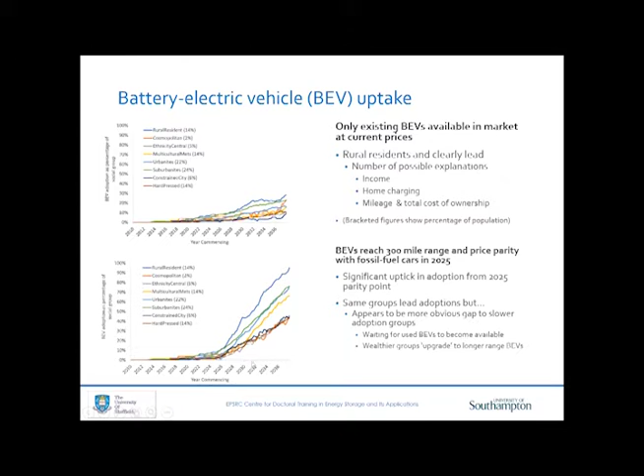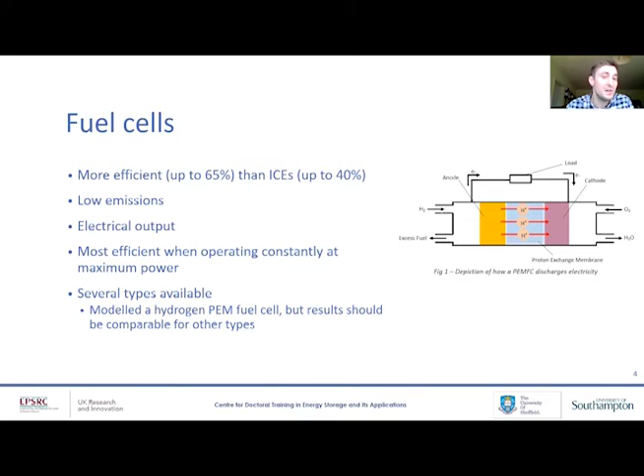There are several possible candidates for types of fuel cells we could use in ships. For this particular project, I've modeled a hydrogen proton exchange membrane fuel cell, but I do believe the results from this study are comparable to other fuel cell types.

Auxiliary services, auxiliary demand, hotel load—these are all terms for the energy demand on board a ship that doesn't go directly to propulsion. For example, major loads include compressors, pumps, heating and cooling. The main thing about these is that they do tend to have an electrical demand. Therefore, this is why we're interested in them in the context of fuel cells.

So the main idea behind this piece of work was to analyze whether we could retrofit hydrogen fuel cells onto existing operating large-scale ships in order to decarbonize some of the energy demand of the auxiliary services. To do that, I've used some data provided from Shell, from a large vessel, to analyze its historical auxiliary demand, then try to size and figure out what kind of scale fuel cell and hydrogen we might need on board.

Then I've simulated what the output of these different setups might be on a voyage by voyage basis, and also tried to outline some key opportunities and technical challenges.

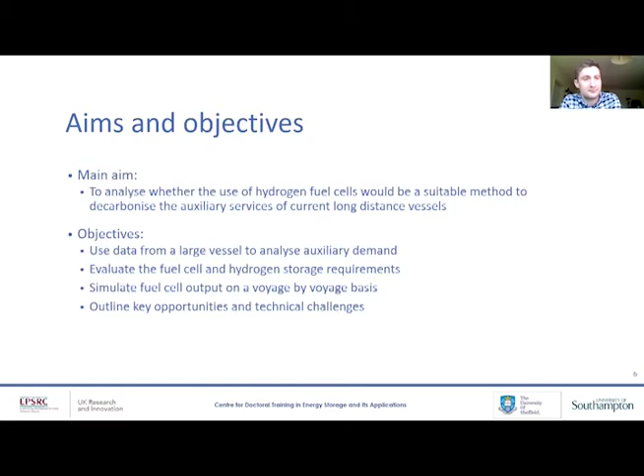So as I said, the ship itself happened to be an LNG tanker, which is a relatively large ship, and we've considered the ship to have typical operating patterns of a large ship. So the results from this study should be not only comparable to other tankers, but also other large vessels such as container ships.

It's possible by looking at the data to break down the usage of this ship into 33 different voyages over a 12-month period. In other words, this was 33 separate opportunities to refuel. For the purpose of this case study, I've assumed that hydrogen refueling would be available in every single one of those ports. Obviously, that wouldn't be the case in the short term and might take a while to develop.

So it's important that any concept we put forward should be capable of operating without access to hydrogen for a long period of time. But for the purpose of this exercise, I've assumed that supply would be there. This fleet in particular actually currently runs off 3 separate fuels: liquefied natural gas, heavy fuel oil, and marine diesel oil. And the simulations that I wrote were in Python.

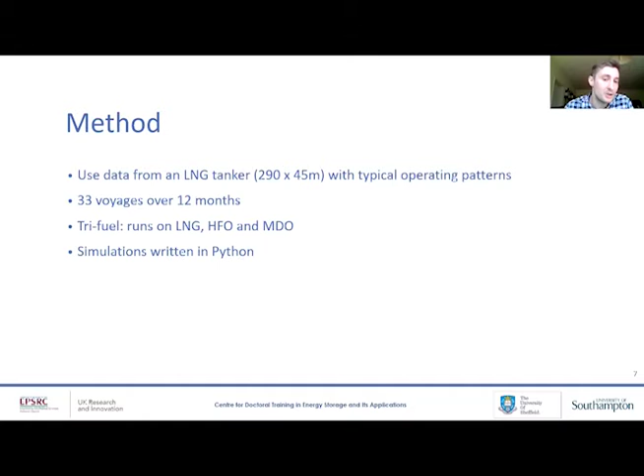For this particular investigation, we've decided to focus on looking at the auxiliary demand of the ship whilst it's in transit, i.e. when it's not in port. There's a couple of reasons for that. First, when it's in port, that's when we're going to want to refuel the hydrogen, so we might not necessarily have access to it at that time. And there may be better options for meeting the auxiliary load when in port, such as cold ironing, which is where you basically plug the ship into the local national grid.

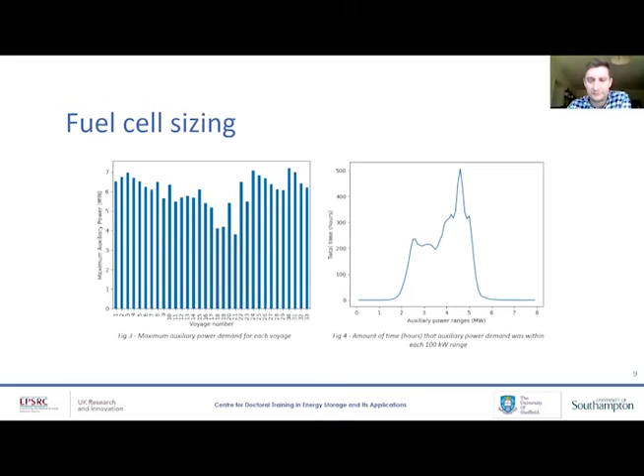5 minutes left, Charlie. Sorry? 5 minutes left. Okay, I'll try and hurry up.

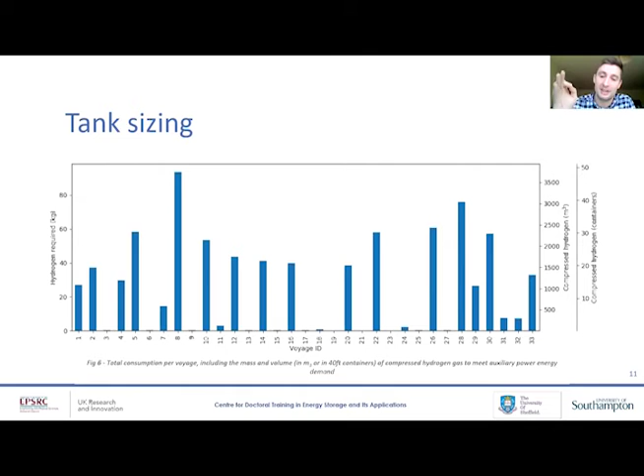So the far right axis, I've tried to show exactly how much this equivalent would be in terms of 40-foot containers of hydrogen, to put it into a shipping context. And for this particular case study, we decided to pick 10 containers worth of compressed hydrogen as quite a modest starting point to see how far that would go.

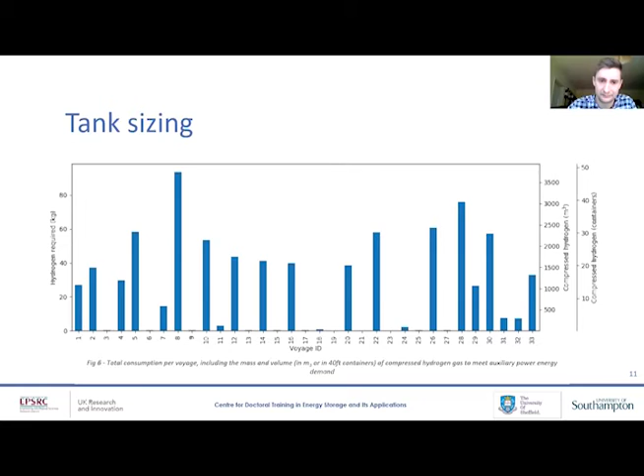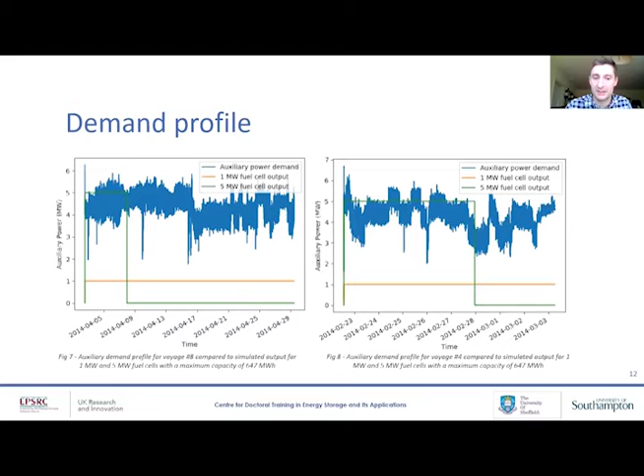So we conclude from this that if you're doing lots of long voyages, then a smaller fuel cell would be better. And if you're doing lots of short voyages, then a larger fuel cell would be better. Obviously if you're using a smaller fuel cell, it's going to cost less and take up less room. So we could judge that for a given period of time, there probably would have been an ideal optimal fuel cell size for a given hydrogen capacity.

So I wrote a simulation to look at these different fuel cell sizes, how much the fuel cell would have outputted, how much excess energy would have been lost, and therefore the total fossil fuel reduction. I'll try to go through this quickly, but for this given case, we can see the 3 megawatt fuel cell would have actually been optimum.

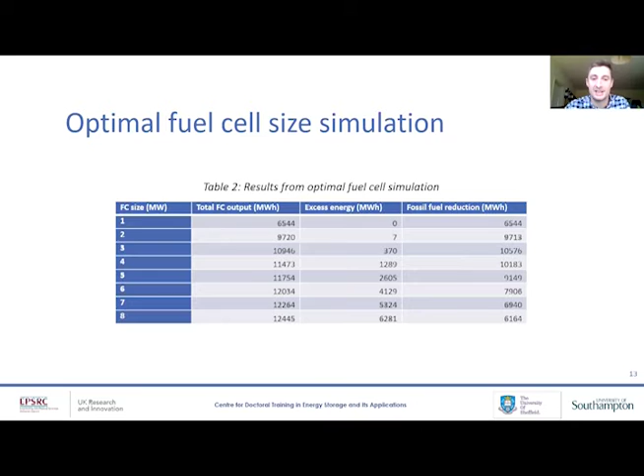To put some numbers behind that, for this case study of a 3 megawatt fuel cell and 10 containers worth of compressed hydrogen, which is quite a modest introduction, this would have outputted 10.6 gigawatt hours of the 24.4 gigawatt hours I pointed out in an earlier slide. Based on historical fuel usage, we could compare this to the actual to show the amount of fuel saved, which would account to 2,343 tons of CO2 emission savings per year, which is quite significant.

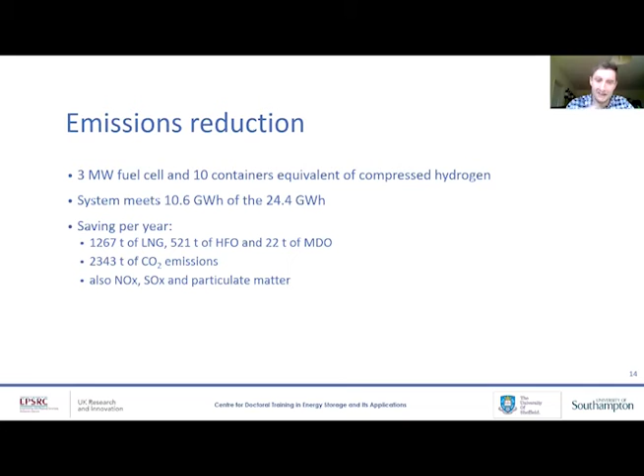As well as other emission savings such as nitrogen oxide, sulfur oxides, and particulate matter. So to summarize, from quite modest additions in this case study I've simulated, we've made quite big emission savings. We've also found that if you're doing lots of long voyages, a smaller fuel cell is preferable, and for lots of shorter voyages, a larger fuel cell is preferable for the same hydrogen capacity.

Obviously there's quite a few technical challenges with this. The hydrogen supply might not necessarily be available to begin with in the short term. Hydrogen is always tricky to store, so that's a consideration, and there would be a capital cost with this concept. But I think this would be a really good learning opportunity if this is the way the industry is going to go, and we're going to be using fuel cells on ships in the future anyway. Having experience of handling hydrogen and seeing how fuel cells work for these large vessels would be invaluable at this stage, so I think there's some merit behind it.

Okay, thank you for listening, and I'd like to hear your questions.

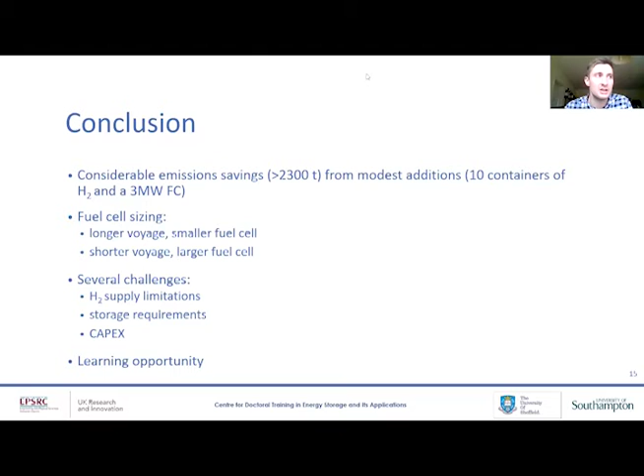So in terms of what's out there at the minute, there's very little examples of fuel cells being used on ships. These tend to be for short distance ferries or very small scale ships such as the Energy Observer. There's not really any demonstrations of fuel cells being used on large scale ships, which is why we feel like this particular concept could be a kind of gateway into trying to demonstrate that.

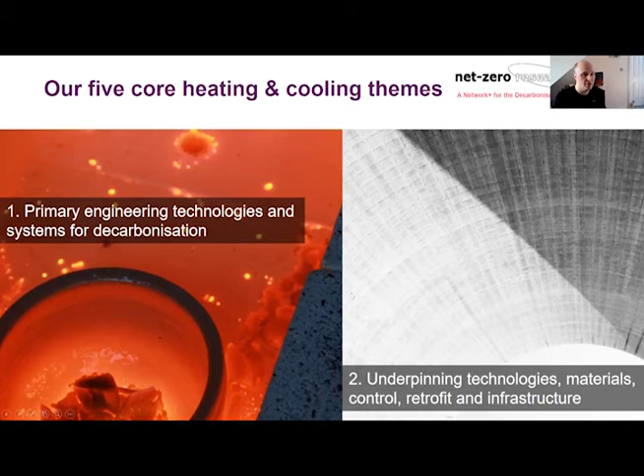The question on a holistic level is what does our future energy system look like, and how will that support heating and cooling, and how do we afford that, and how are the economics working alongside that? Then there's the less scientific domains, but really key and important - understanding how users and social impact of changing our heating and cooling systems will affect them, and how can they feed that information back to the engineers. Then we've got the policy side, where we're coming to terms with the idea that heat will be more expensive in the future. How do we set in place the right kind of policy to support and help roll out and manage people's expectations of that, as well as developing the leadership to help us do the transition to net zero.

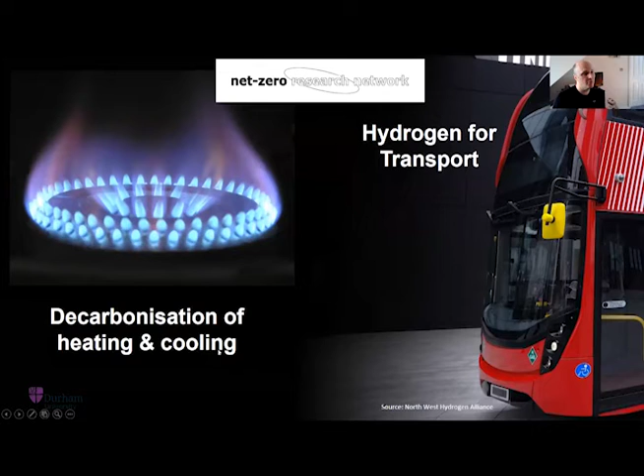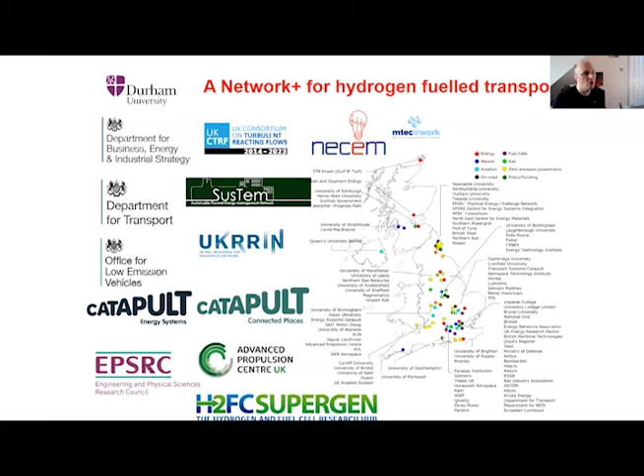Now, moving on from heating and cooling to the transport side, we have a similarly sized network, again cutting across industry, academia and government, on how do we roll out hydrogen for transport.

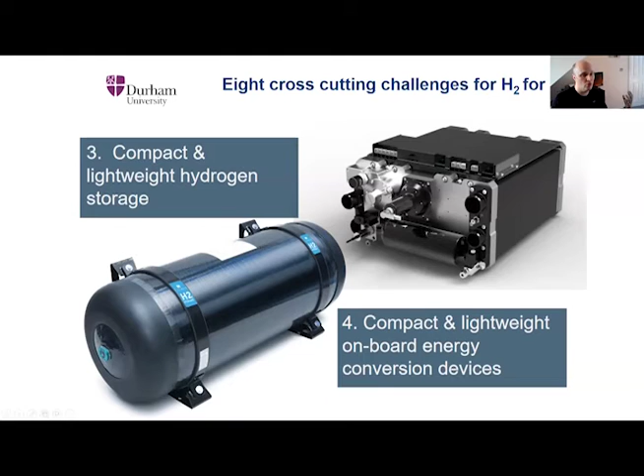This one's got 8 themes. One is where does the energy come from for all this hydrogen and how do we get that to work? How do we produce that hydrogen - there's many ways of producing it. How do we distribute it? How do we store it on board vehicles, and how do we make that compact and lightweight? How do we convert it to electricity on the vehicle, whether that's fuel cell or internal combustion engine or another technology? What about the powertrain of the rest of the vehicle?

Essentially, it's the same as an electric vehicle, but how does that work uniquely for hydrogen? How do we work with hydrogen in terms of its safety, and the materials that are used and needed in order to keep that safe?

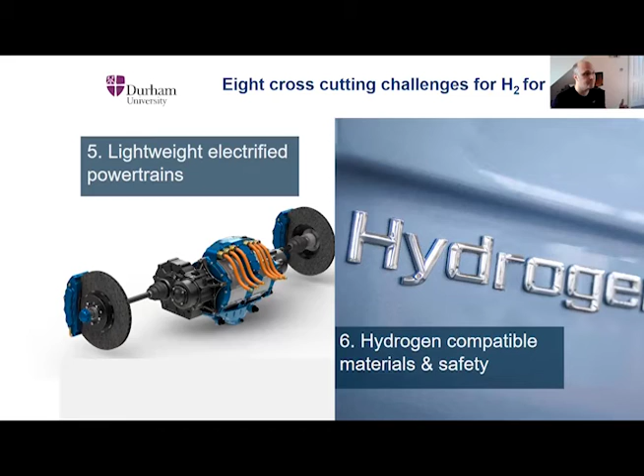Then you've got more transport-related and specific actions, such as how does it fit within the future transport system, whether that's across multiple modes, logistics and autonomy. There's a huge opportunity for hydrogen in this space. And then, of course, how do we incentivize it through the right kind of policies? How do we understand its economics and its societal impact? So that again cuts across every aspect of hydrogen.

The most relevant to you is obviously the theme about storage.

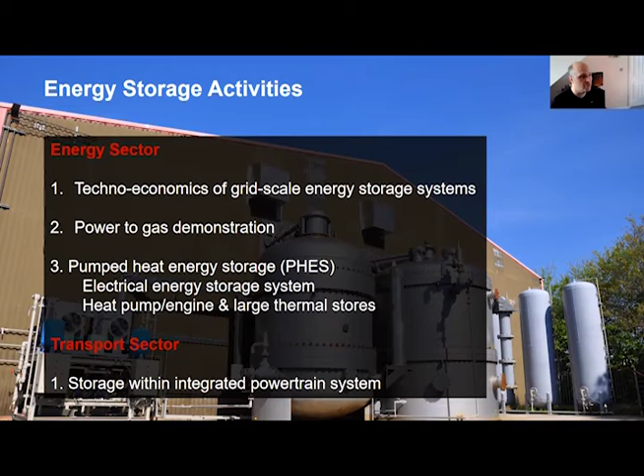The inspiration for this work was that there was a ban on petrol and diesel cars planned for 2035, and there was discussion around this 2035 figure. Obviously this is a rapidly changing thing, because in the last few months it's now gone to 2030, and from what I understand, it's a hugely political driven target, so it's quite possible it could come forward again. When we did this work, the target was loosely 2040, and it was surprisingly put at 2035. But what we wanted to do is understand, if people do put a ban on petrol and diesel cars, what the likely performance of those cars and different technologies would be at that particular moment in time.

So we got a project funded by the Advanced Propulsion Centre via a grant that went to Brighton University, and we've already published this work. We published it in January last year, exactly 12 months ago, and already by the end of the year it had already been pushed to 2030. So thank you very much for that.

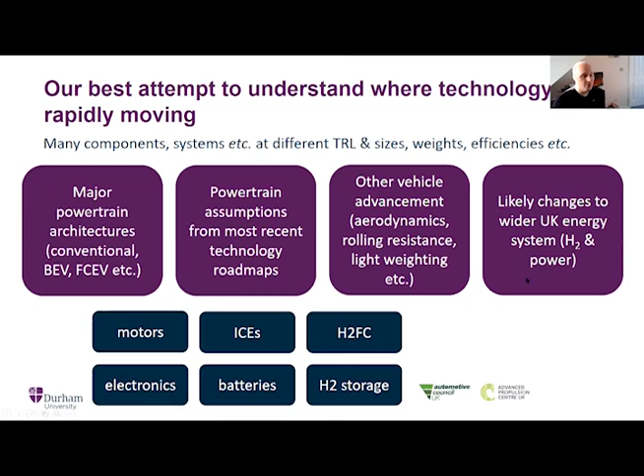So we built a modelling framework to do that. Essentially, we built a model of a truck, and then drove that truck all day over the same driving cycle. That allowed us to work out what size motor, what size engine, what size energy storage system we need in order to complete that journey. So it allowed us to automatically design a powertrain and size it.

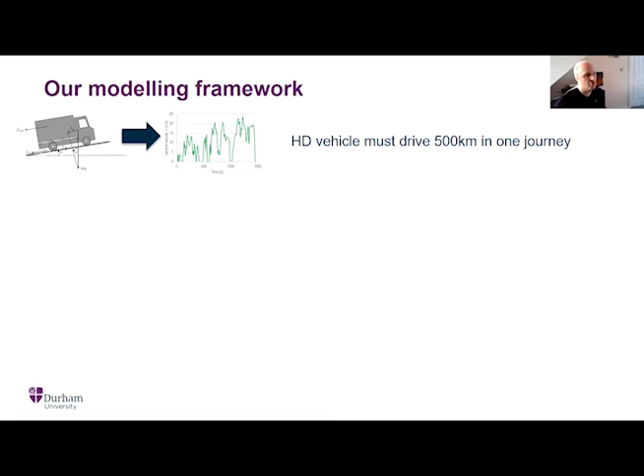That was done in a number of stages. First was to work out how much power is required to get up the hill on the journey, how much onboard energy storage would be required to complete the journey, how big the powertrain and storage medium needed to be, then working out how heavy the system is and iterating that back through again, because the power required is a function of the system weight.

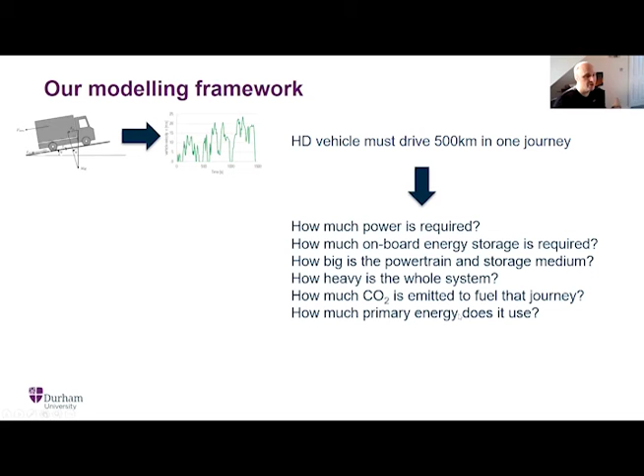From that, you can then work out how much CO2 is emitted to produce the fuel used for that journey, and how much primary energy is required to do that journey. The outcomes are a lot of data, and a lot of sensitivity studies are published in the work, but the key summary is as shown.

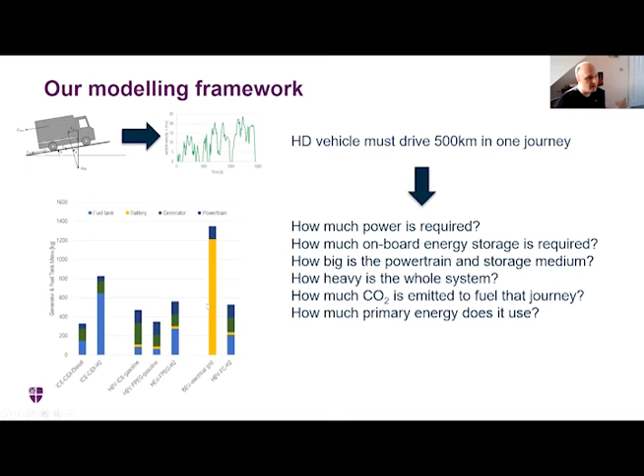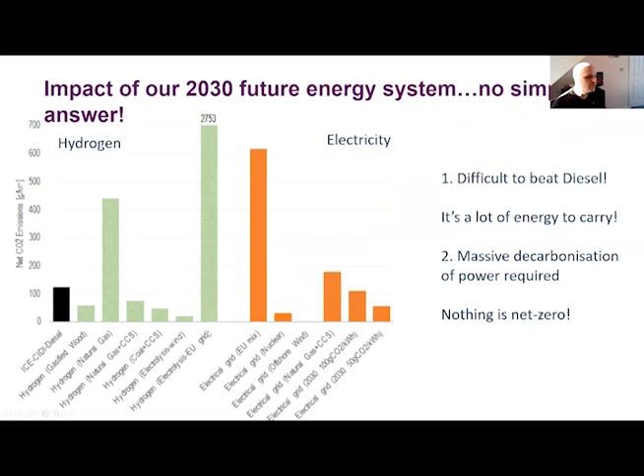So if you go back to, so it depends primarily.

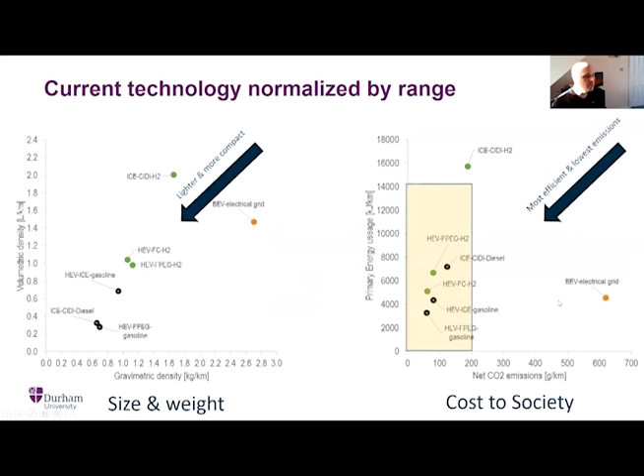So what we took for this BEV case was the electrical grid from a European data set, which tends to be more decarbonized, but less decarbonized than the UK, for example. So yes, it sticks out. There's a number of parameters in there. It has good primary energy usage in general compared to the others, but it depends on the carbon intensity of your electricity and what's picked. When you're thinking about it in CO2 terms, you've got to think about it like this, because it's all going to change.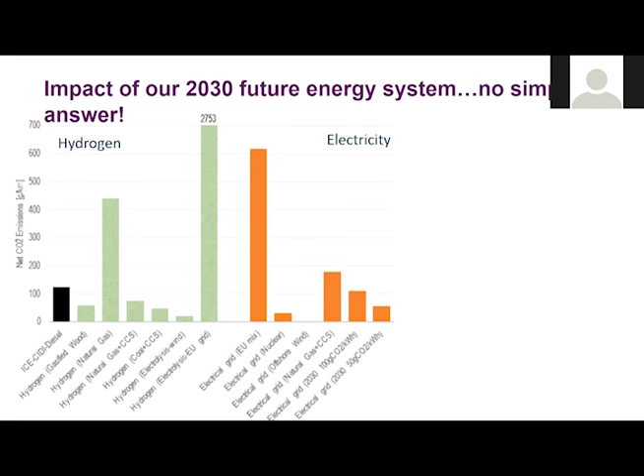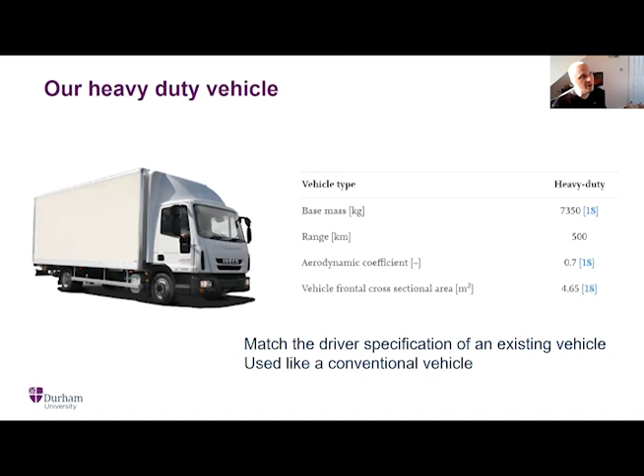In the modeling part of the lorry that you did, with the weights of the diesel engine and the battery, and you've got the bar chart showing the different weights, what's the maximum payload of the lorry that you've used? Because obviously the battery took the greatest weight, but what is remaining that you can put onto the lorry to then transport? Yeah, so we had to make some assumptions here. We basically had a choice: we could either pick the base mass of the truck with nothing in it, or we could pick and put something in it and include that. We chose to pick just the system with nothing in the back at this moment in time, but with the model we could add on the number. I think the key thing on the trend was the more mass you put on the system, the more it moves in this direction - it becomes more favorable, or I suppose less favorable to battery electric, as a trend.